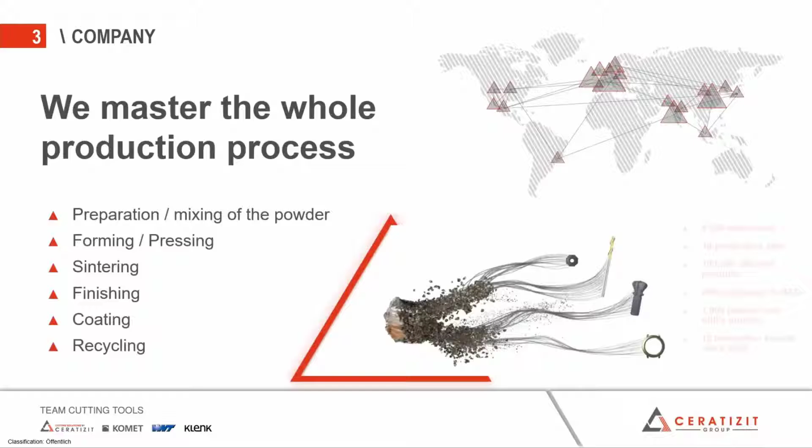At CERATIZIT, we master the whole production process. As part of the Plansee Group, we have exclusive raw material sourcing. This means that we master the entire process chain. We take the stone from the mine to production to produce the powder. We shape it, sinter and grind it, coat it, and after use, we recycle the carbide to close the loop. With this, we ensure our customers the highest quality.

With our 4 product brands, we have basically everything for machining. Under the CERATIZIT product brand, we have tooling with indexable inserts for turning, milling, and grooving, as well as ultra-hard cutting material. And we have ToolScope.

Then we have the KOMET brand with indexable drilling, reaming, fine bore tools, as well as actuating tools, with an additional axis on the tool directly.

The product brand WNT with solid carbide drills, end mills, taps, more or less everything to round up the portfolio, including tool and workpiece clamping.

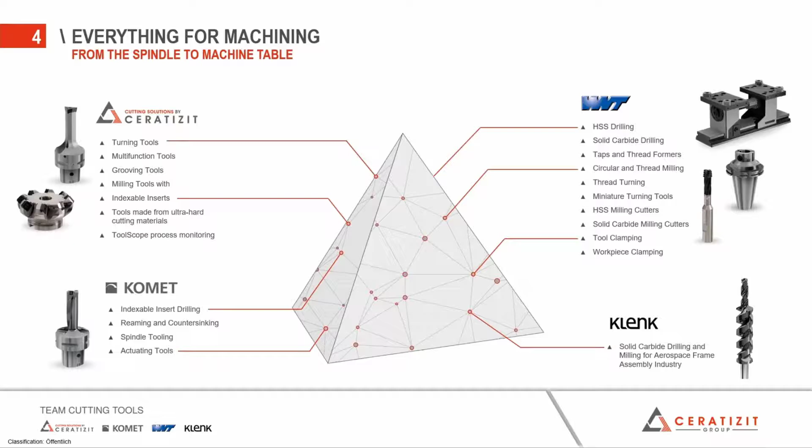And then we have Klenk. Klenk is an expert focused on specific solutions for the aerospace industry. With all these product brands, we offer a full range, starting with high quality tooling, process monitoring to get the most out of every tool, and finally recycling to make again high quality tooling.

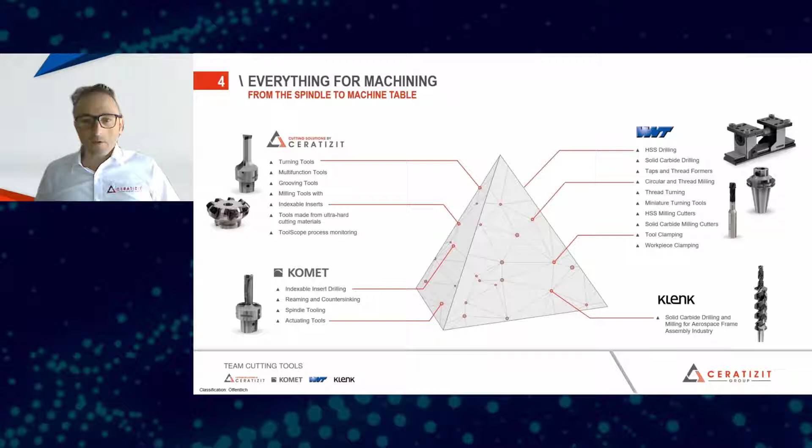So that's it for a brief introduction to our company.

And now let's step into high dynamic turning with FreeTurn tools. The driving force to develop this revolutionary process was pretty simple. Turning, in its most basic form, hasn't changed in decades.

With FreeTurn, we change this. We use the milling spindle of the multi-purpose machine to achieve incredible flexibility. FreeTurn moves turning from 2D to 3D. We use the Y and the Z axis plus the milling spindle to create the high dynamic turning process.

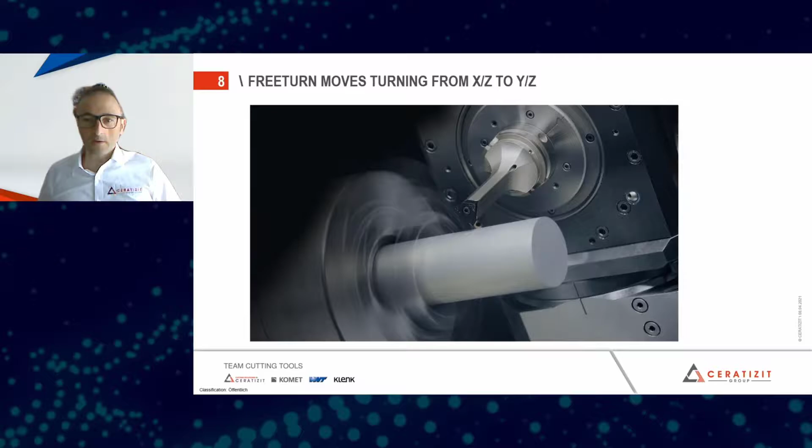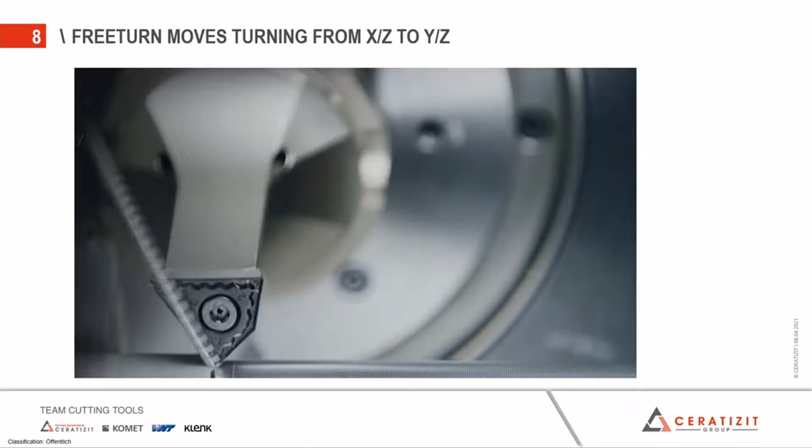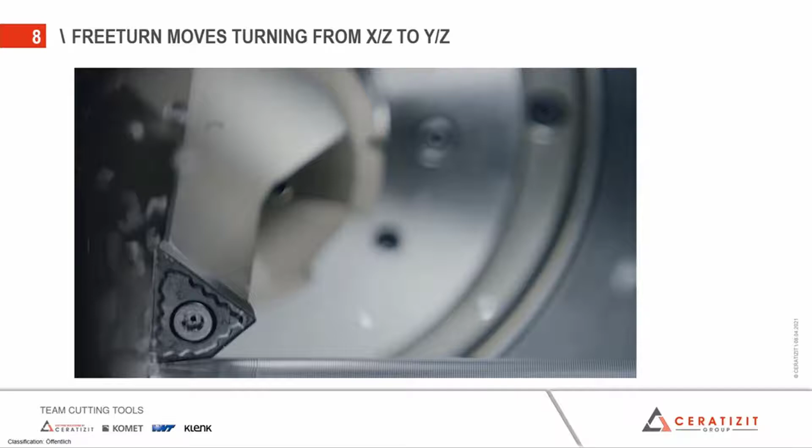In this video, I will show you how it works. The tool, in this case with HSK-T connection, is clamped in the milling spindle. The center of the insert and the rotation axis of the spindle are in line. This offers an enormous increase in flexibility while turning. You're completely free to change the approach angle, even during the cut.

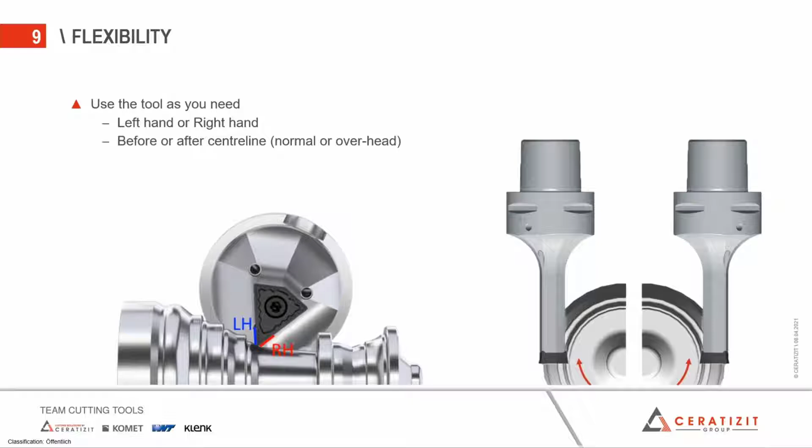With the ability to change the orientation of the tool, we are free to use the tool either left-hand or right-handed, or in overhead position, all with the same tool. Another thing is, with the FreeTurn tool, you have the possibility to have the smallest tool change system in the world.

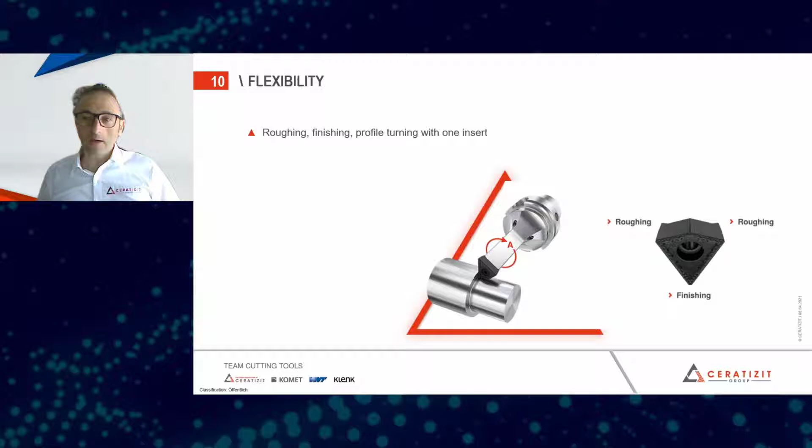Here we have an insert, and this insert is available where we have two cutting edges with a roughing chip geometry, and we have one tip for the finishing application. Combined in one insert, you can switch fast and close to the work part from one edge to the next.

How does this look like in an example? This is shown here: it's machining of a steel shaft on a state-of-the-art multitask machine. We start with machining a 90-degree shoulder.

By the way, we're looking in this moment from underneath to the top of the machine. The camera is lying on the floor in the machine so we can view the process. This orientation of the machine gives us a very nice chip evacuation.

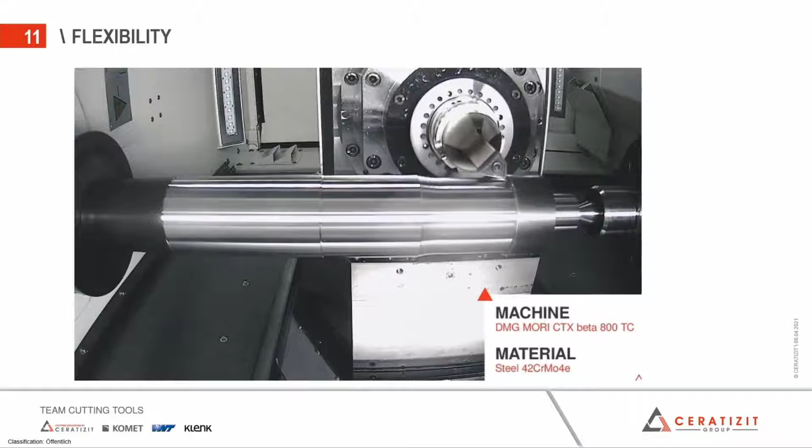The shoulder machining is followed by opening a pocket. You see now the FreeTurn tool is moving backwards and forwards. With this, we reduce the non-cutting times to an absolute minimum.

No empty tool paths. In addition, we use the left and right hand cutting edge of the tip, which results in a better tool life than machining only in one direction.

And now finally, the finishing. The cutting edge is following the contour perfectly.

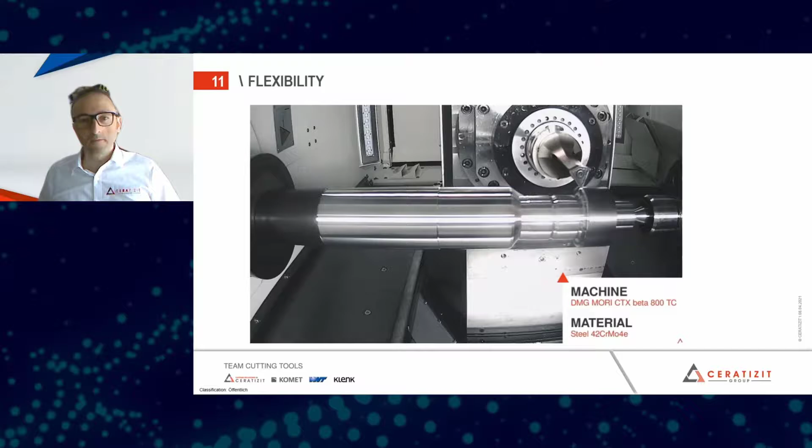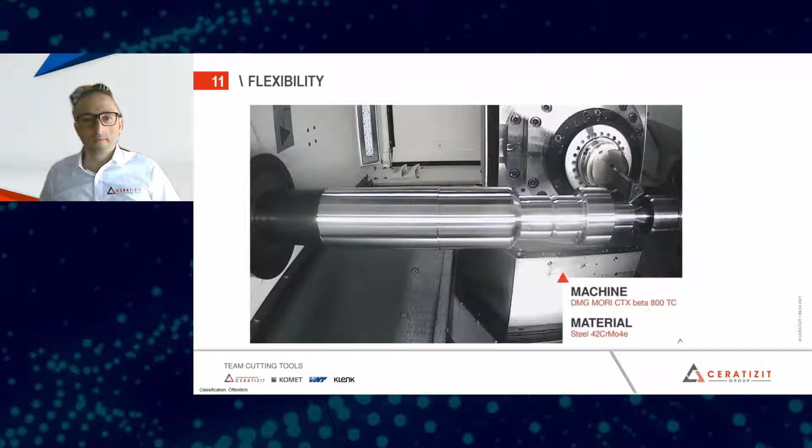Now I guess you have a good idea what high dynamic turning with FreeTurn tools is. When talking about this innovation with all the possible benefits, immediately the question comes up how to program the motion of the tool. This is the point where NX comes into play.

CERATIZIT as a company has a long relationship with Siemens and NX. We use the software in different departments, in R&D, design, and of course in production. Our experienced people noticed soon that NX manufacturing is well supporting FreeTurn, meanwhile for years. And now I would like to show you some of the features in NX we use for FreeTurn.

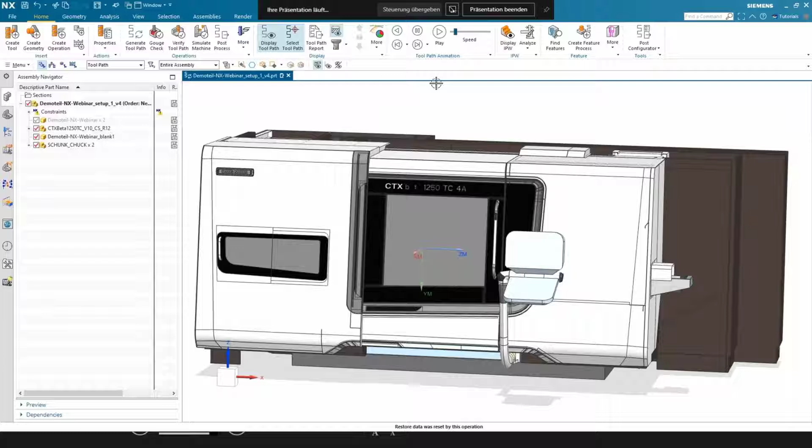So what we have here now is the digital twin of one of our machines. This is the DMG Mori CTX Beta 1250 TC4A. We have this machine in one of our technical centers, but at the moment we don't need it. We need a workpiece and chuck to show you the high dynamic turning with FreeTurn.

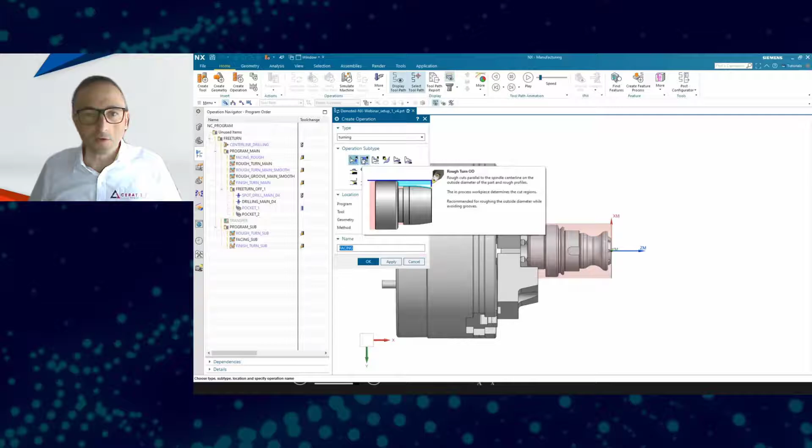First of all, what NX offers to work with FreeTurn is we can use all the standard operations. So if we create new operations in turning, we can use the facing, the rough turn OD, the finishing pass, and in NX1953, in addition, we can use the rough turn smooth, which is a really nice option also with FreeTurn.

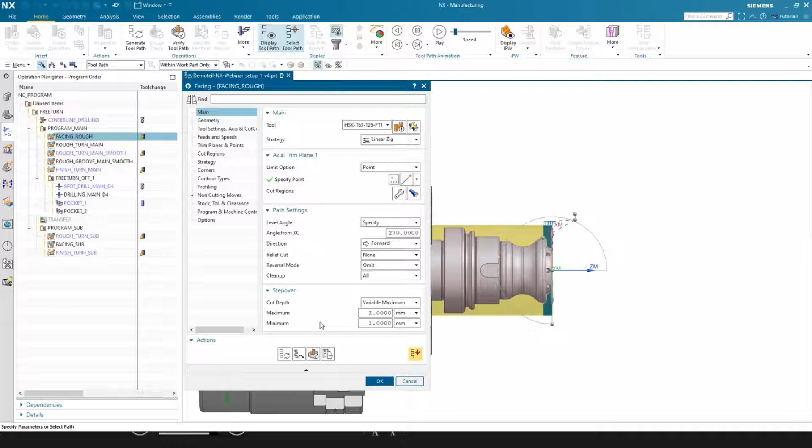How does it look like to show you a tool path? I can show you the facing operation. So if you go inside the facing, it is very much the same as you know from working with standard tooling. So we have here tool paths.

We can use in NX with FreeTurn all the strategies that NX is offering. We can use the linear zig, zigzag, ramping, contour zig, whatever we need, whatever we think is beneficial for the cutting process.

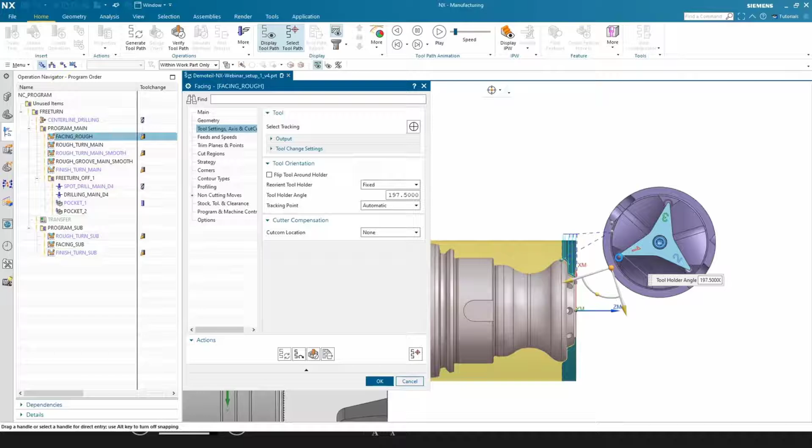We can change the orientation of the tool for every operation we have. So in the tool settings, tool holder angle, we can change completely freely how we want to use the tool. And creating a new toolpath, the toolpath is adapted to the new orientation of the tool.

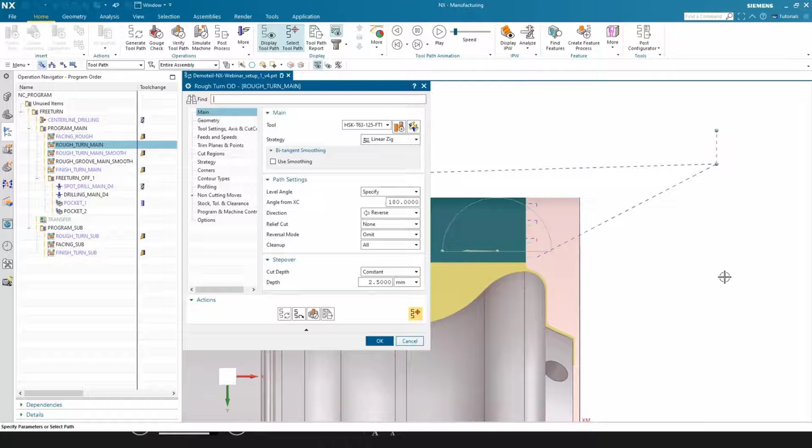What else can I show you on the rough turn OD? I can show you some more options we can use. So again, in all operations, I'm able to change the tool holder angle, so I can adjust the tool perfectly well to my process as I want to have it, as I need it.

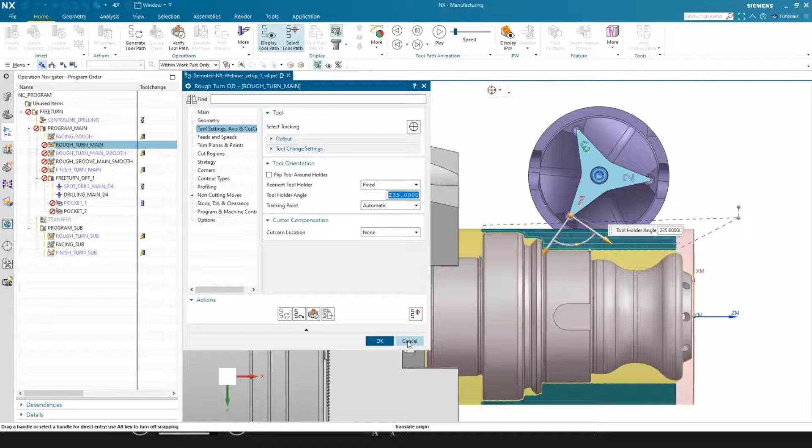In this case, I can use the different strategies. In this case, we have the linear zig. I can change it to a linear zigzag to minimize long non-cutting moves.

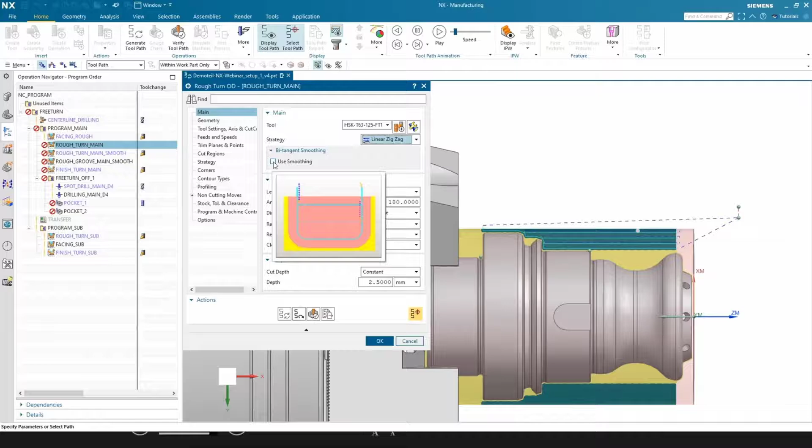I have the option to use smoothing. In this case, you see in the corner we have sharp corners. If I add the Bi-tangent smoothing and some radius, I create the tool path. I have a very nice radius to make a soft entrance into the workpiece, and the tool is cutting into the material.

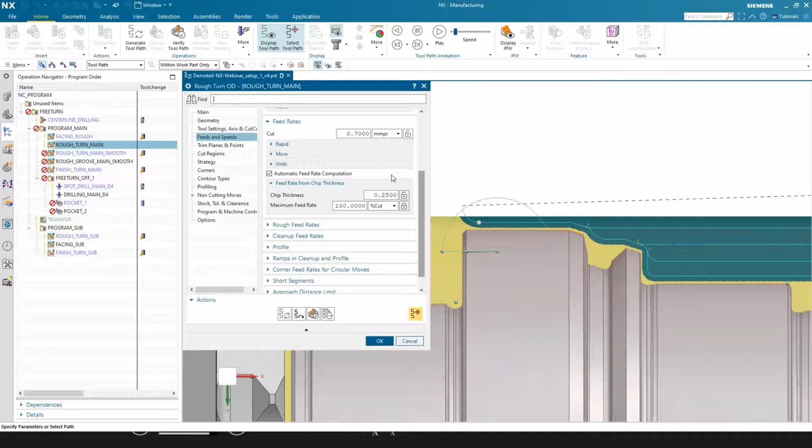A very, very nice feature NX offers is the automatic feed rate computation. So in comparison to programming a feed per revolution as a fixed value, with the automatic feed rate computation we're programming a chip thickness. This means NX is calculating, in relation to the approach angle of the cutting edge to the work part, what feed per revolution the machine must go to achieve this chip thickness.

And I can show you an example. If I create a toolpath and go to the simulation - okay, a little bit slower - and let's take the assembly.

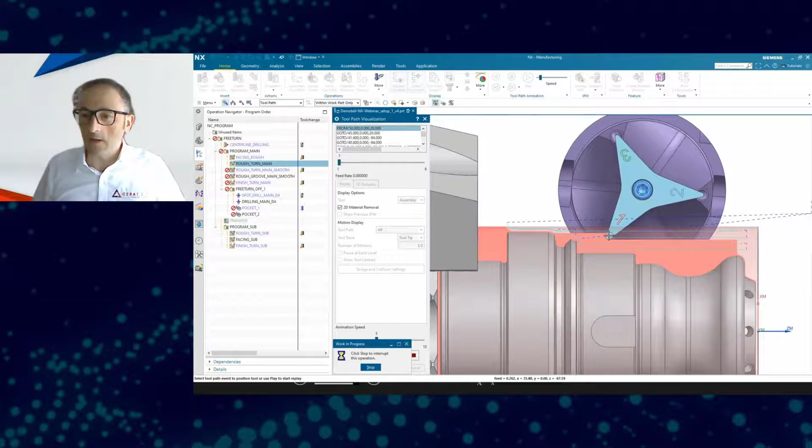In the simulation, on the bottom line, you see the real feed, the actual outcome of what the machine will do, and it's not 0.25. In this case, it's 0.41. This is the required feed to achieve this average chip thickness. On the forward cut, it's 0.26 - again, the required feed to achieve this chip thickness.

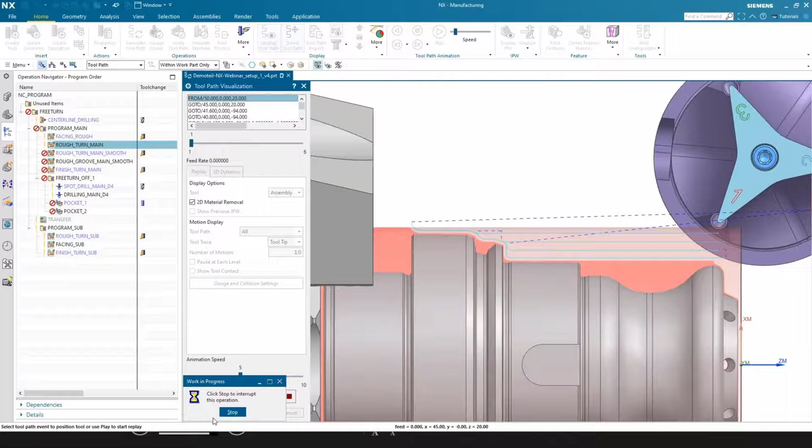Good, I think we can stop here. What else is NX offering?

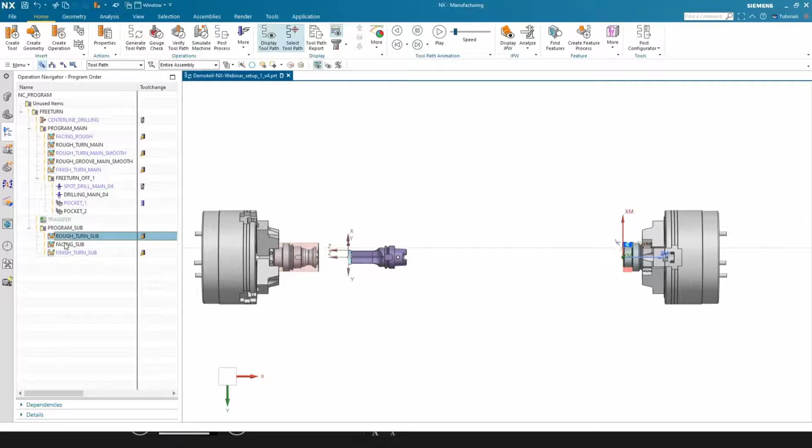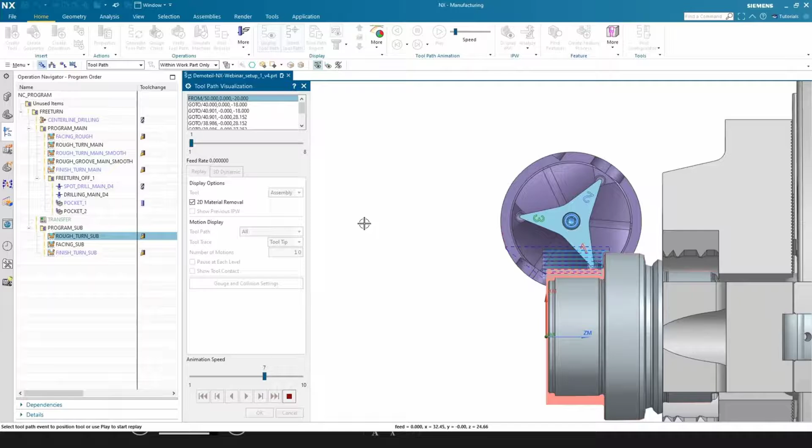We can do this operation on the main and the sub spindle. If we use FreeTurn, we speak about multitask machines, and these typically have a main and a sub spindle. So we can do the same roughing and finishing job on the sub spindle. If I go into this operation, create the toolpath, do the simulation again with the assembly and 2D material removal, we have the roughing job on the sub spindle. So NX is very well supporting this multitask machine technology.

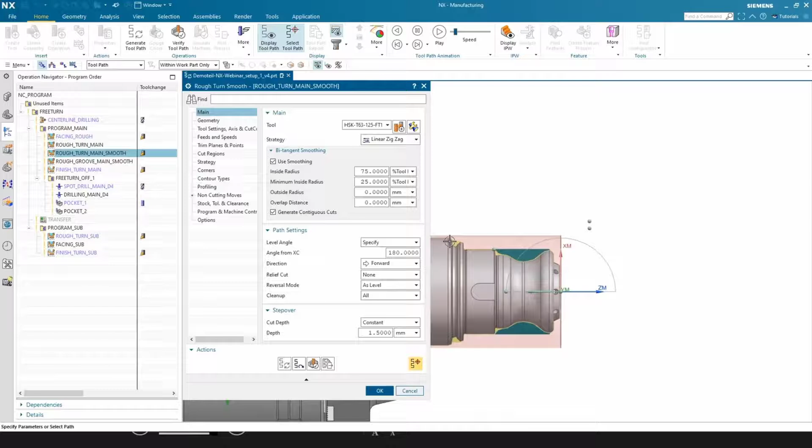In the beginning, I quickly spoke about this option for smoothing. This is a new feature, and it's very nice and very helpful. So I can show you how to rough machine a pocket using this smooth operation.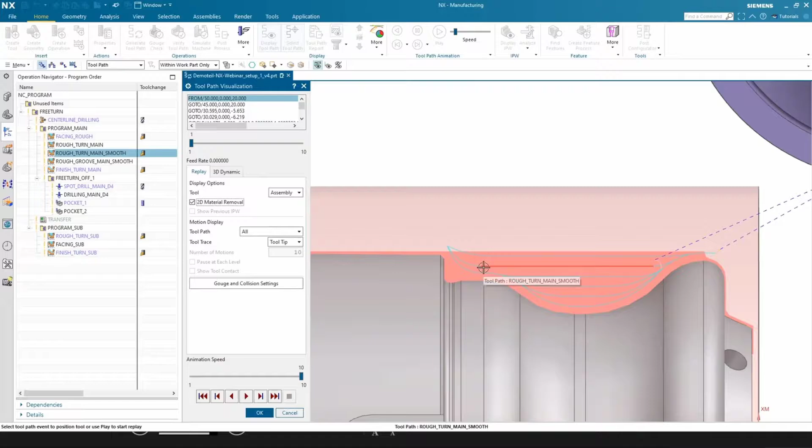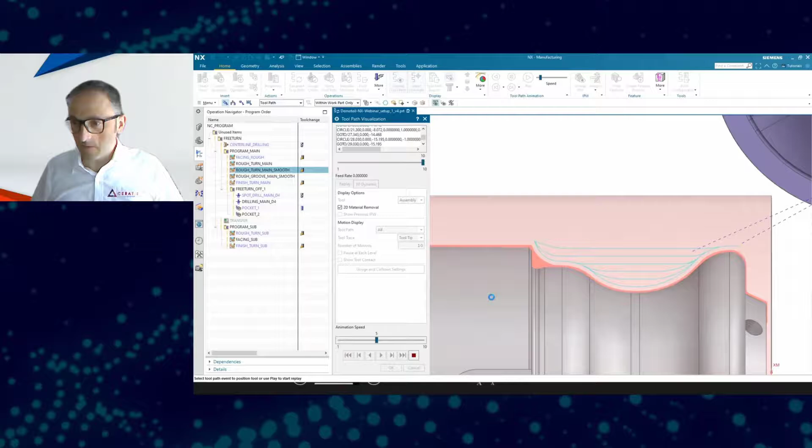If I go into machining, you see in the toolpath there are big radii for entrance, big radii for going back into the material. So on one hand we have a continuous cut, and then a soft entrance into the component, which is really nice for the cutting edge. You see very nice movements back and forward with soft entrance into the component - a really nice option for this pocketing operation.

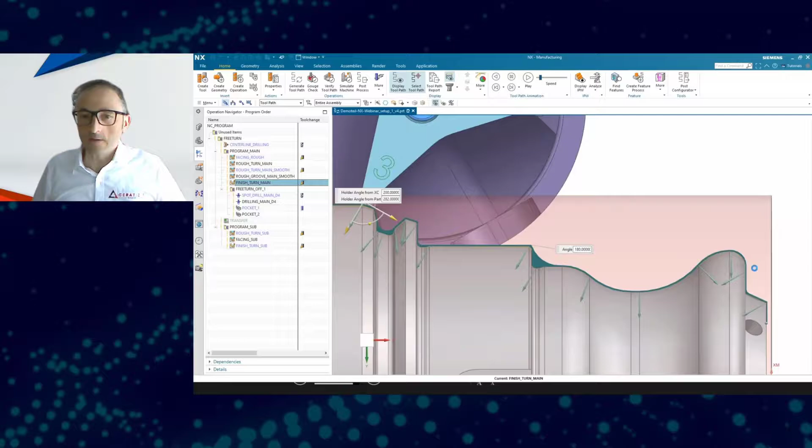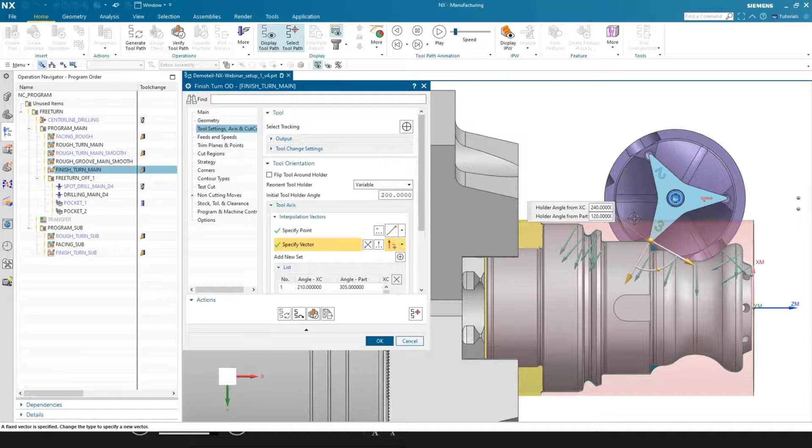One more nice feature, especially if we have less space, is on the finishing operation. For the finishing operation, we can define the tool path with lots of different interpolation vectors, as they're called. So I can define different positions at various points of the component, and this gives me the dynamic motion, the nice motion with the FreeTurn tool.

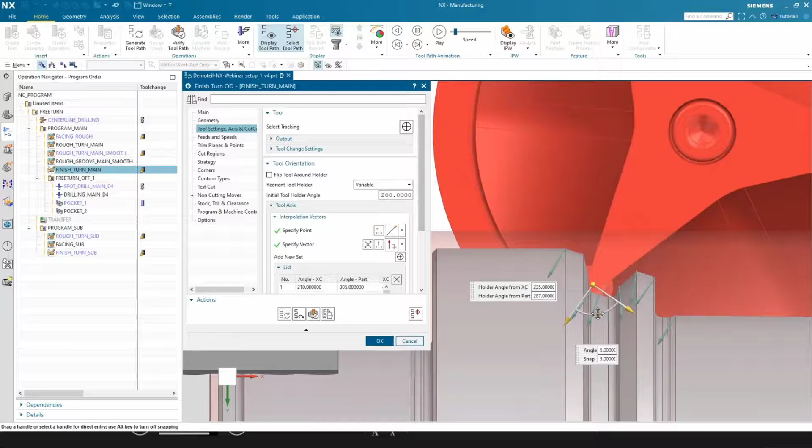If we have a situation where we don't have too much space, to avoid any collision with the work part contour, we have good feedback in NX. It gives us optical feedback if we have a collision with the work part or not, if we're safe - this is really nice. Also, working with 3D, we see very well if we have any interference with the contour or if we're safe in this position.

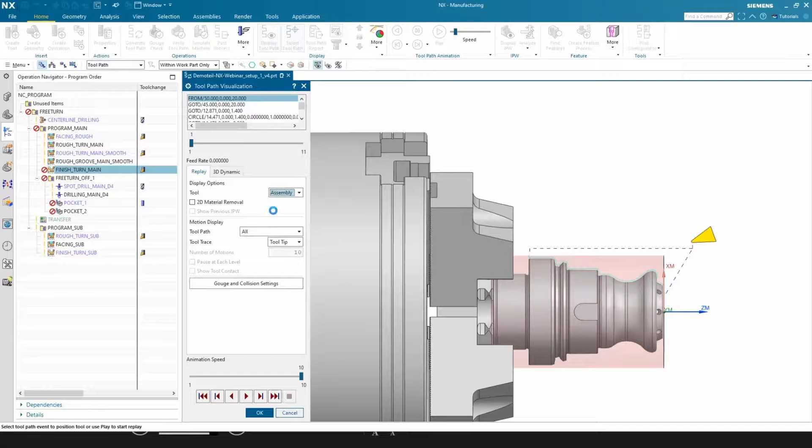Good. And finally, we can also do the simulation here to see the nice dynamic motion of the FreeTurn tool.

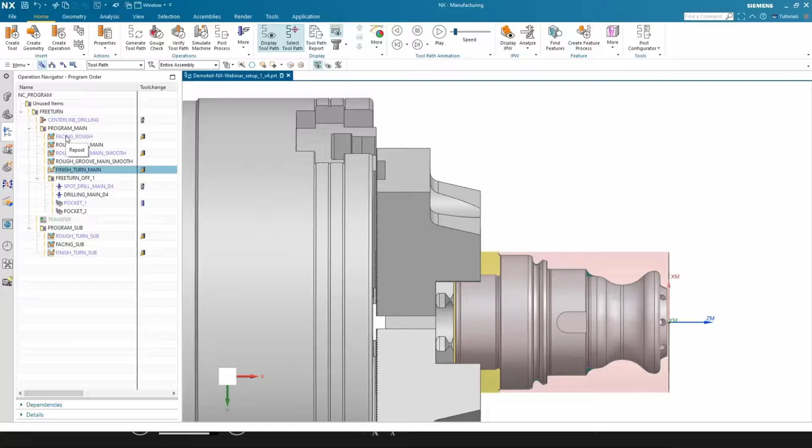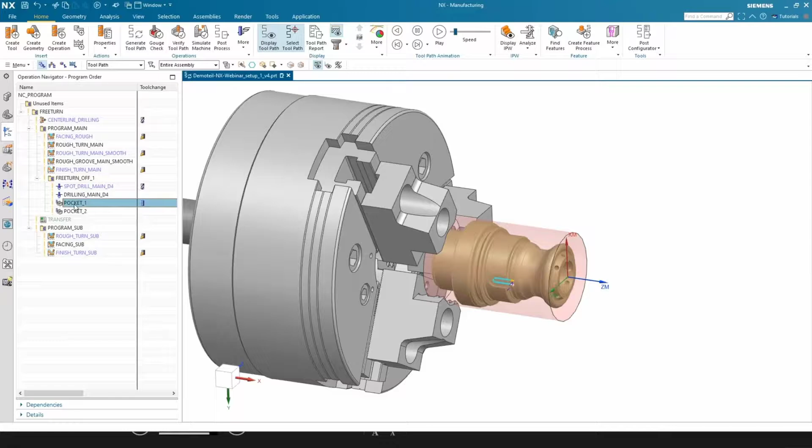For the user, for the programmer in daily work, FreeTurn is almost the same as the standard programming tool. What you see here on the left side are the different operations, one in a row with other operations. So if we have some outside turning operations with FreeTurn, then we have a spot drill operation for some holes on the front side of the part. If we look at the simulation, it shows that the FreeTurn operation itself is one operation in a row with drilling and milling operations on the main and sub spindle. So for the user, for the programmer, it's very much the same whether he works with conventional tooling or with FreeTurn in NX - and this, in my point of view, is very nice.

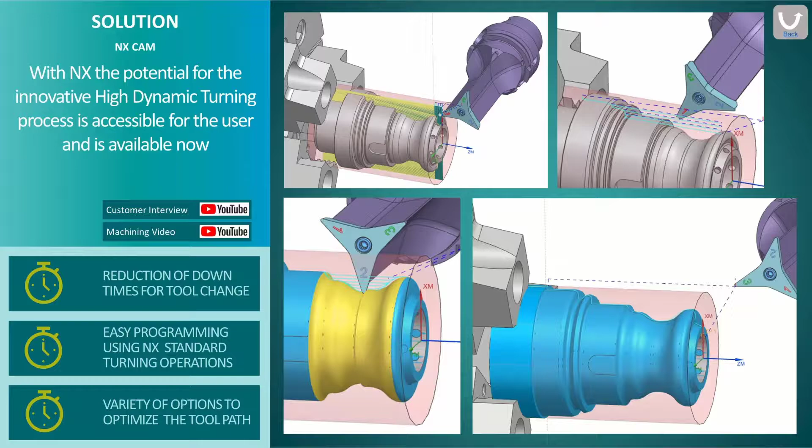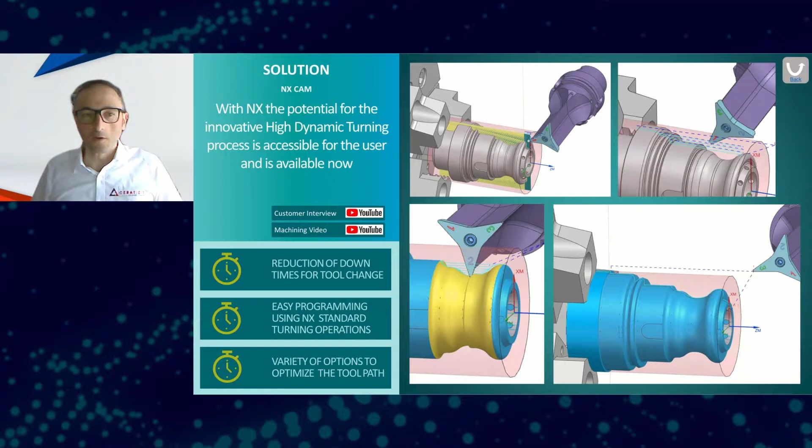So these are some of the features I wanted to show you related to FreeTurn in NX. If you're interested in more details, we are going to prepare a webinar with all the details on how to program FreeTurn in NX - tool definition, path creation, combined with real machining. So if you're interested, appointments will follow. Then I say thank you from my side, and have a great day.